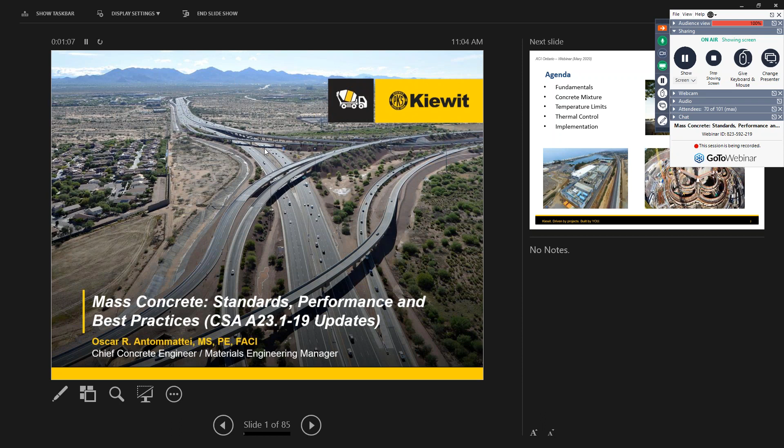So the way that I selected to split this presentation is talking about a few fundamentals, so we kind of start setting our mindset of these discussions and why it's so important. Talking a little bit about concrete mixtures, and then go directly into the temperature limits, thermal control, and implementation.

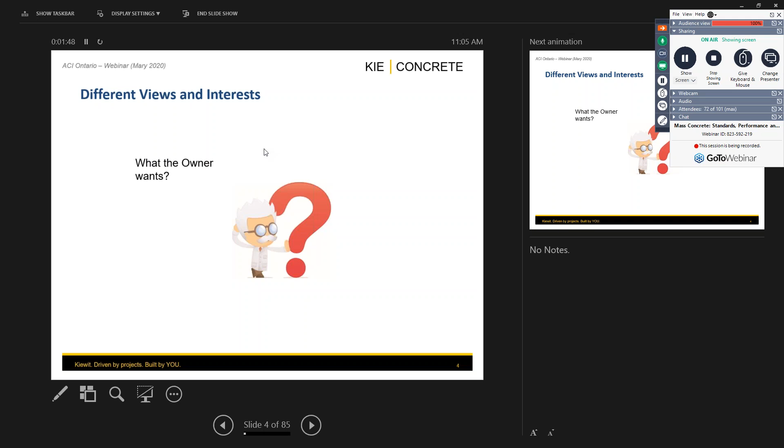So the first thing to understand, and this is really important because there's always going to be different views and interests within our projects: there's always going to be the opinion from the client, from the owner, what the owner wants to build, why they're so concerned about things that we most likely from the engineering side or construction side are not concerned. Why do they want to achieve that? That's extremely important for all the parties to understand.

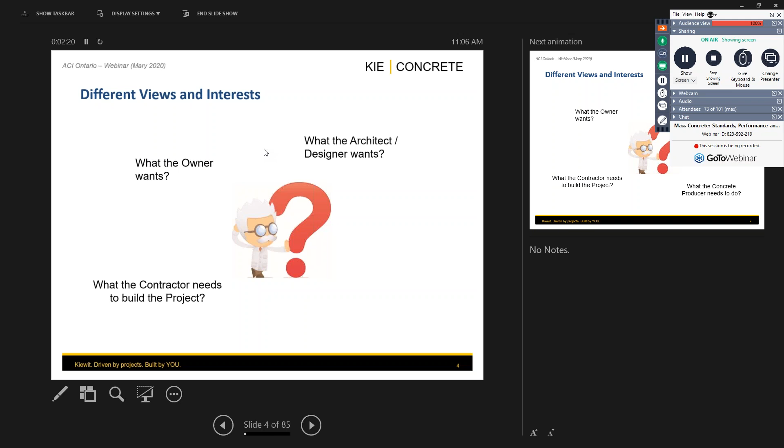Also of importance is to understand what the architect and designer wants to design for and how they're going to meet the design intent for the owner goals, for the owner vision. That's obviously going to be impacting a lot how the contractor then is going to be using information to build the project. Without having the vision of the owner, the requirements from the architect and designer, it's going to be really difficult for the construction team to make a determination what's going to be the final goals of the project to build the project.

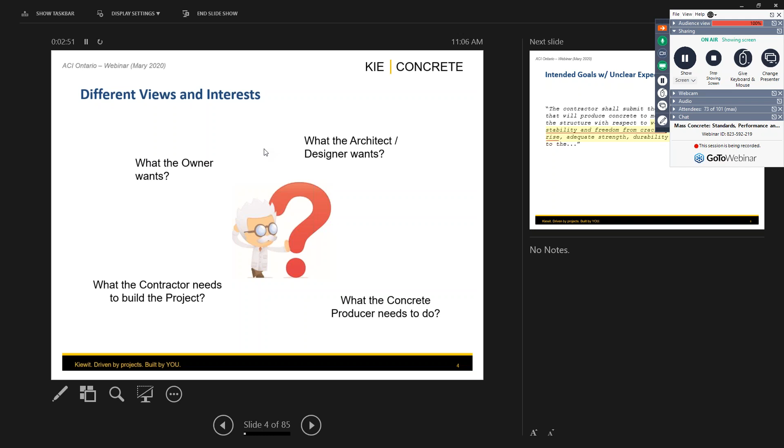And then obviously without forgetting what is important for the concrete materials, how the concrete producer is going to be part of all this effort and what they need to do to ensure that the construction demands are addressed for the construction team to build the project, and how they're going to meet the design criteria to comply with the engineering aspects of the work. Extremely important. Also thinking about,

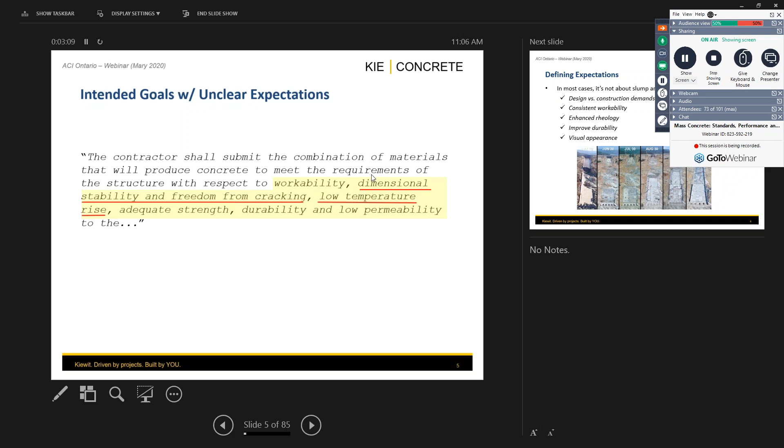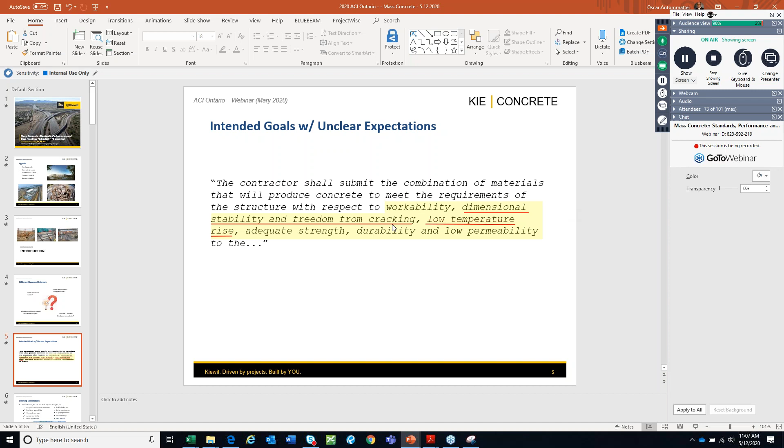Okay, give me a second. I need to make some edits here. Stacia, you tell me that you're seeing my display on the computer? Yeah, I see the next slide. Okay, so thank you. Perfect. So I'm gonna do something here. That's what happened to me too. Okay, no worries. I'm gonna be doing something different here. I apologize. No worries. Let's see if this one works now. That's perfect. Better. Okay, perfect. Thank you very much for letting me know.

So then the other thing that is important to understand as we are working on developing expectations is that there's going to be intended goals from the specifications, but we need to make sure that those intended goals are clearly defined in the specs. And this is an example I like to show because you can see that there's intended goals as part of the specification, but there's no clear expectations on how you're going to meet those goals. And that's extremely important for thermal control and mass concrete too.

In this case, you can see here a very broad sentence from a spec that says the contractor shall submit combination of materials that produce concrete to meet requirements with respect to workability, dimensional stability, freedom from cracking, low temperature rise, adequate strength, durability, and low permeability. But in this spec, and I don't want to get too much into where this project came from, what is the client that shared this spec,

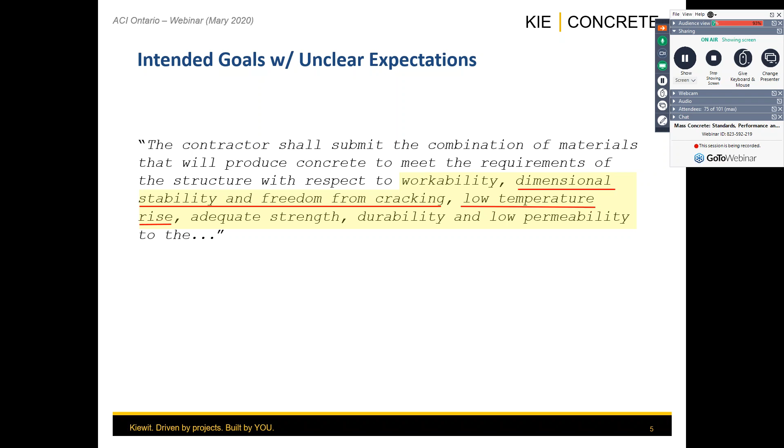in this spec, they didn't have any requirement for shrinkage, any requirement for temperature rise. There was no requirement for permeability, and the only requirements were mainly from a slump perspective and a strength perspective, and some other prescriptive requirements associated to the material requirements. That doesn't help much to define expectations. So it's extremely important that the specs provide clear expectations associated to the goals of the work.

And another thing that we need to be aware of is that in today's market, it's not only about slump, it's not only about strength. Concrete is more than just slump and strength. There's a lot of effort into understanding the performance of the work, the quality of the work, how we can achieve durability. In many cases that we have architectural enhancements, how the visual appearance of the work is going to show up, and also what is going to be the quality efforts and how we're going to meet the design

and construction demands. So when we look at defining expectations, we need to understand that there's more than just a couple things. We need to put in place what is intended to be achieved with the work and how we're going to be able to have a constructible design, a sound design that is going to be able to be built in the field.

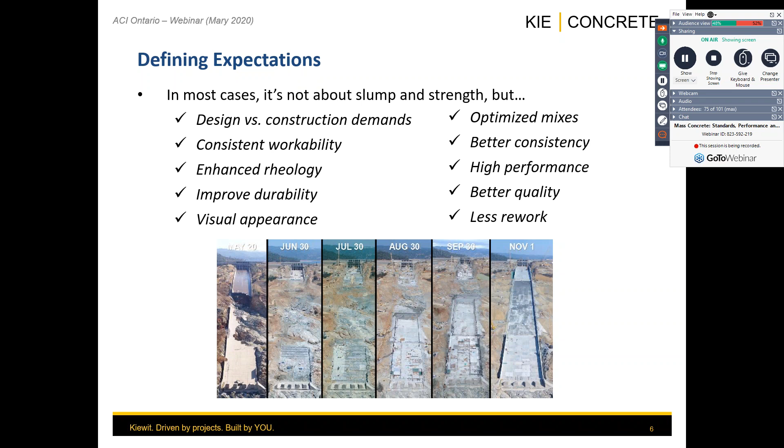So let's talk about fundamentals. And from fundamentals, I'm starting now to show some of the things that we're doing now in CSA. So one of the things that we did in CSA during this past cycle was going over everything associated to mass concrete. I'm going to start talking about the definition. You're going to see in the notes to the definition that there's guidance provided in an annex.

Annex T is an annex that allows you to read through the general considerations for defining mass concrete, for implementing thermal control plans. All of that is going to be included in Annex T. Section 7.6.3 is now the mass concrete section, and you're going to be able to see through this presentation that it is very comprehensive. It's going to talk about definition, concrete mixes, temperature limits, thermal control planning, temperature monitoring.

So let's start with the definition. I'm showing here on the screen the definition that we provided now in the 2019 version. What is important about this definition? Well, what is important is that it's broader into what can be mass concrete and what is not mass concrete. There's not one single dimension that is going to control what is mass concrete. In general terms, there's typically a minimum dimension somewhere around 1 meter where you start seeing the concrete behave as mass concrete.

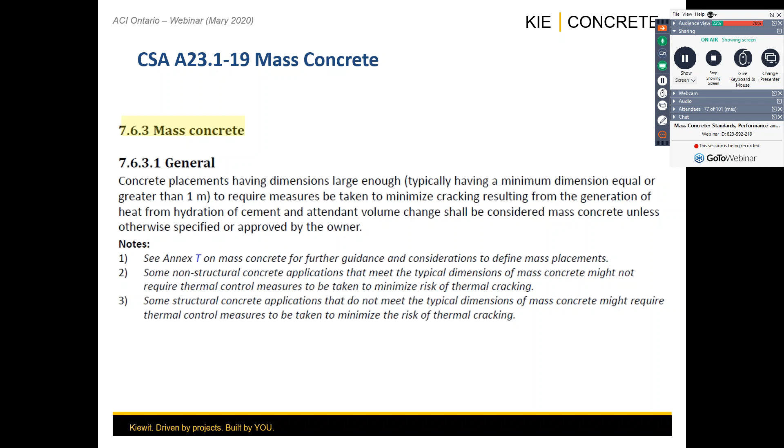So there's a lot of different things that the engineers and the construction team need to consider to determine what is going to be mass concrete and what is not. It would be preferred that the drawings and the specifications give a clear understanding for the project of what's going to be mass concrete. But from a standards perspective, we cannot establish one thing or the other. We can at least provide the definition and then provide guidance within the document to make a determination.

Why is that important? As I mentioned, there's different types of mass concrete. In Canada, you can see a lot of the traditional mass concrete in projects like hydro projects, where you have spillways, big dams, large generation of power with water in the hydro agencies. A lot of those become more of the traditional mass concrete. You implement traditional concepts of mass concrete.

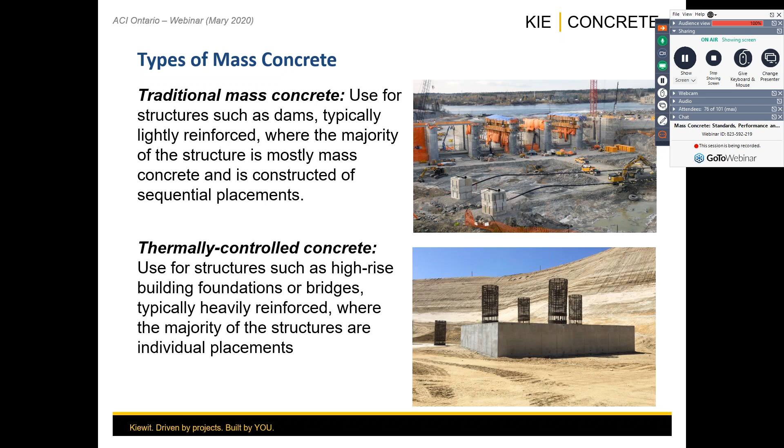But also a large part of the industry in North America is thermally controlled concrete, where you get more into high-rise buildings, into bridges, where you have heavily reinforced concrete, higher strength requirements, higher early strength requirements, and those are also different from traditional mass concrete. So when you're looking at thermal control planning and how you're going to implement best practices, you need to understand the goals of the project, the sequences of construction operations, the design criteria concerns, and then identify what thermal control practices are appropriate for the different applications.

In simple terms, when we talk in ACI and CSA, this is very common. You're mainly looking at: is the concrete hot enough? Do you have enough cementitious material that is going to generate a lot of heat? Or is the dimension of the placement large enough? So what happens there? Thermal risk is going to increase as your mix has higher cementitious materials, because it's going to generate what?

Higher temperature. Then also larger structures are going to have higher thermal control requirements, because they're going to trap the heat. They're typically going to show a higher temperature rise too. And then you're going to have to make sure that you protect the concrete from the thermal conditions. So in general terms, when you look at CSA and ACI, the main focus is going to be on the mixes and the placements.

That's the way that we're going to try to make a determination here of how to define mass concrete. Every project is going to be different. Every project is going to have a different way of looking at it. But from a standards perspective, those are the main things that you're going to be thinking about when defining mass concrete.

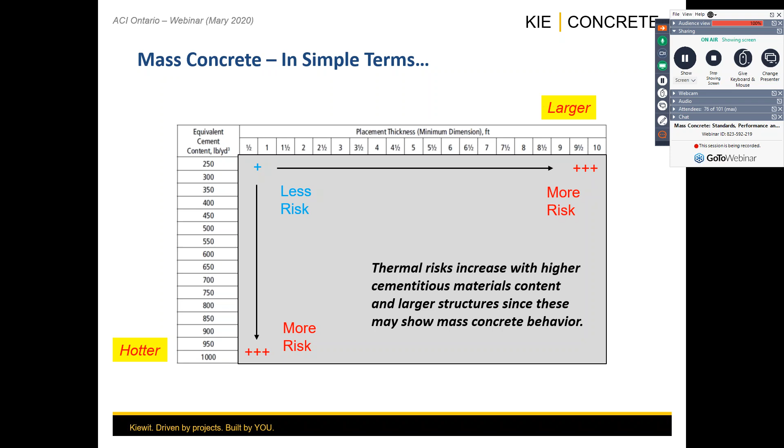So from a concrete mixture perspective, we also need to understand the basics of concrete mixture proportioning and what the standards typically require. There's going to be strength requirements, durability requirements, workability requirements. There's going to be aspects of economics associated to how we determine the mix proportion. But in our case for mass concrete, we're going to have also a thermal aspect associated to developing the mixes.

Meaning that when you have a 35 MPa concrete mix that you're going to be using for a non-mass concrete, most likely you're going to have considerations to achieve strength, durability, workability, and economics in a different way than when you're going to do a 35 MPa mass concrete. And it's going to have to be considered. You cannot say that a 35 MPa non-mass concrete is going to be the same mix that you're going to use for a 35 MPa mass concrete. You can use them if you have them optimized correctly, but you need to understand that they're likely not going to be the same mix.

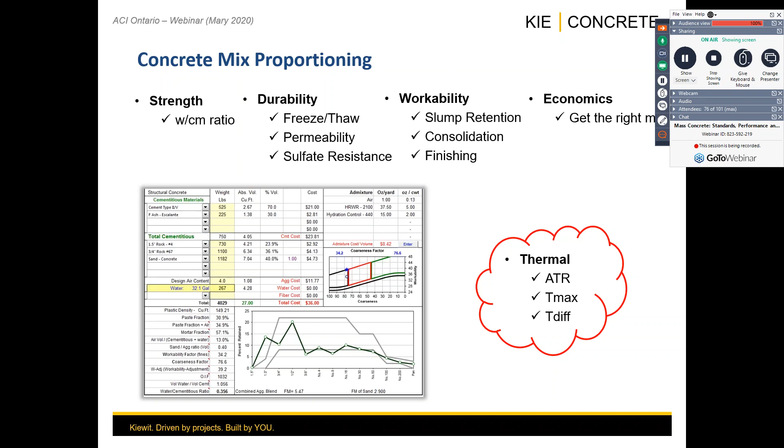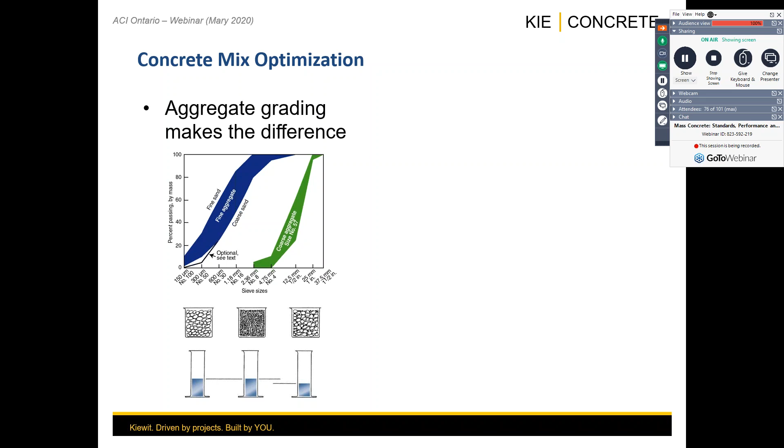And how we achieve mix optimization. And I know in Canada, there's different markets, there's different requirements of how this information is documented for different concrete mix proportions. But in general, there's going to be an impact into how you optimize the grading, how you come up with the mix proportions and ensure that there's a low water demand in your mix by improving the way you select the materials and you select the proportions. But also there's going to be an admixture enhancement for the performance of the product.

So you're likely going to have to then consider, how can I reduce the total cementitious of this mix by improving the way that I come up with the aggregate combinations, with the aggregate selection, with the quality of the materials that I'm going to be using. But also then, after you do that and you have a good mix, how are you going to be improving the performance of the mix to allow for admixtures to be used in the right way. You don't want to be using admixtures as a way to solve a problem that you should have resolved with the materials from a selection and proportion perspective. You want to first have a good mix and obviously then enhance the performance with admixtures.

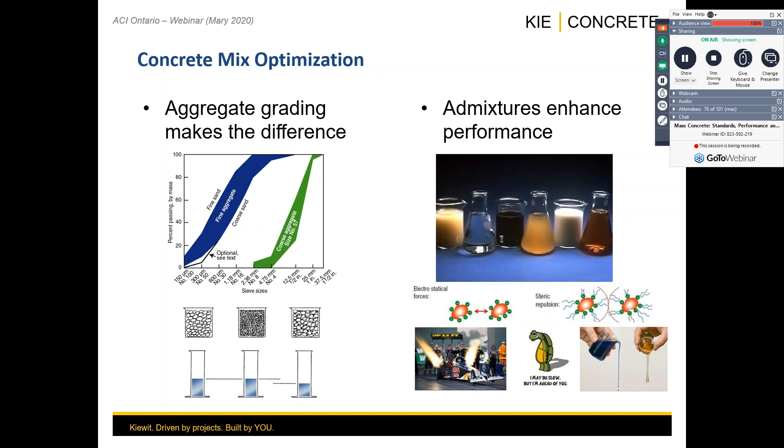So let's talk about temperature limits. I believe this is going to be the bulk of our conversation here. One of the biggest changes you're going to see in CSA, where we expanded how we specify temperature limits for mass concrete. The temperature requirements for mass concrete are going to be under section 7.6.3.2, and this is a very important clause here. And I want to make sure that we just don't jump into the sections below this. We want to understand what this means to the projects.

The temperature requirements for mass concrete placement shall comply with clauses 7.6.3.2.2 to 7.6.3.2.5, unless otherwise specified or approved by the owner. And this is what we're doing here. We're providing all these requirements, but also allowing at the end the engineering team, the owner team, the project to make a determination what is going to be applicable and what is not going to be applicable. And that is an extremely important aspect of specifying. Why? Because there's no one size fits all. And if you try to establish only one size fits all for all mass concrete, you're likely going to have 50% of the times good, and 50% of the times it's not going to be very good.

So with this, we have a standard that has the provisions to meet the objectives and the intent of the standard and be compliant. But we also have allowance for the projects to determine what is appropriate and what is not for different applications, okay? That allows for better flexibility and improves the performance of projects.

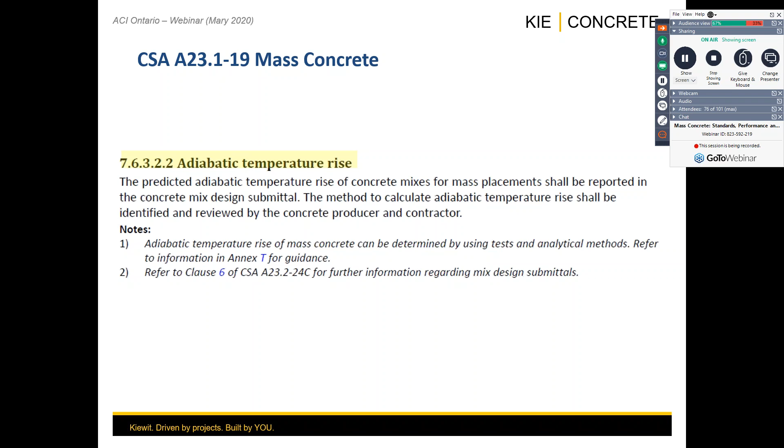It is a very, I would say, interesting requirement that is going to have a lot of questions, I believe, and it's going to have to go through a good level of trial and error and practicing and verification for each of the concrete producers to get familiar. No, it's not a simple thing to just go and say, I know what it is. You're going to have to go through the annex, and the annex is going to go from the simple approach to a more complex approach. So there's a way of doing it for all the different ways that you want to implement here.

So like I mentioned, adiabatic temperature rise is going to be mainly affected by the cementitious materials, the composition, the amount. More cement, obviously, is going to cause the material to generate higher heat. Use of Class F fly ash, in the case of Ontario, is not available, but slag is available. So you can use slag, and you can use low heat cementitious materials to compensate for the heat that you need to meet in thermal control plans for mass concrete. So make sure that you understand temperature rise.

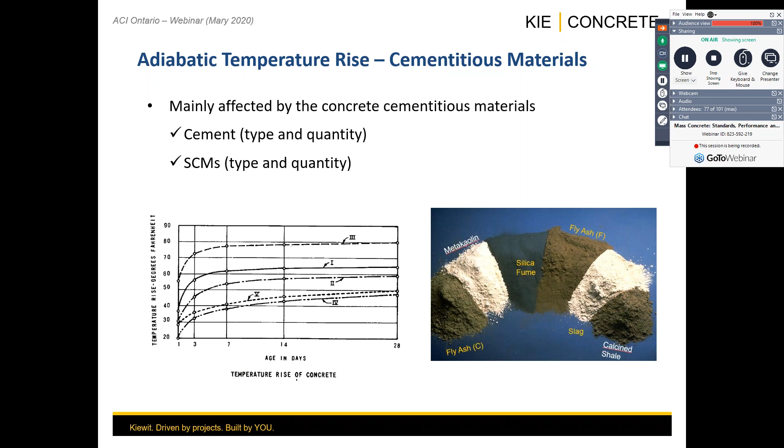In the case of adiabatic temperature rise, I want to share with you some general considerations. In traditional mass concrete, you typically see mixes that have less than 45 degrees Celsius temperature rise. In thermally controlled concrete, more structural, heavily reinforced applications, you typically see hotter mixes. That's expected. Thermally controlled concrete typically has higher strength than traditional mass concrete. Elements tend to be smaller in most cases, and you have more access to different thermal control measures compared to traditional mass concrete in dams. So that's more for guidance, and I'm sharing it in my presentation.

So as you're evaluating the mixes, if you see a mix that you're going to use in traditional mass concrete that has too much heat, most likely you want to start looking at what to do, because it's not necessarily the best thing for a traditional mass concrete placement. You want to optimize that mix. Reducing temperature rise means reducing total cementitious, using less Portland cement and using more fly ash and slags or low heat cementitious materials.

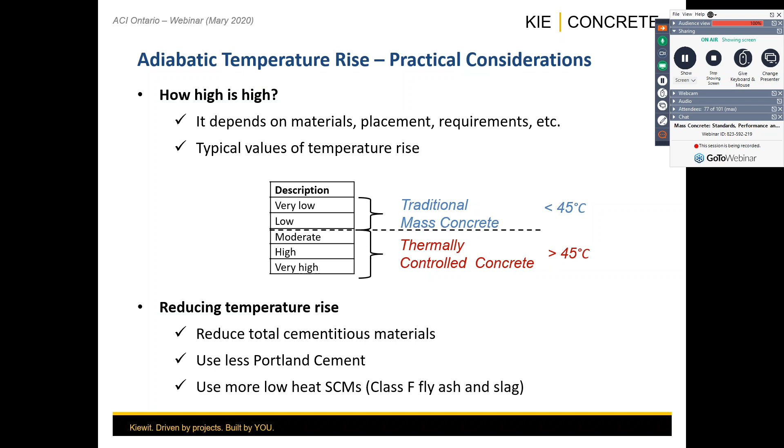This is one example here of concepts that are shared in the annex. You can implement computer modeling, a simplified approach with the calculation that I'm going to show in the next slide, semi-adiabatic testing, a full adiabatic testing method, use field placements and monitor those field placements with sensors and insulation, and even use other methods approved by ACI, such as the Schmidt method, or other methods approved by the owner. So in general terms, there's a lot of ways you can determine adiabatic temperature rise.

It's not going to be a slam dunk. It's not going to be a single value that you're going to determine and never go and revise and verify. I always say develop adiabatic temperature rise, and then go and verify what the temperature rise in the field is compared to what you estimated in your thermal control plan, and then start working on your revisions and updates. So you better go and qualify and refine those temperature conditions in the field more appropriately with the performance of the concrete in service. So those are things that you need to understand as you implement that.

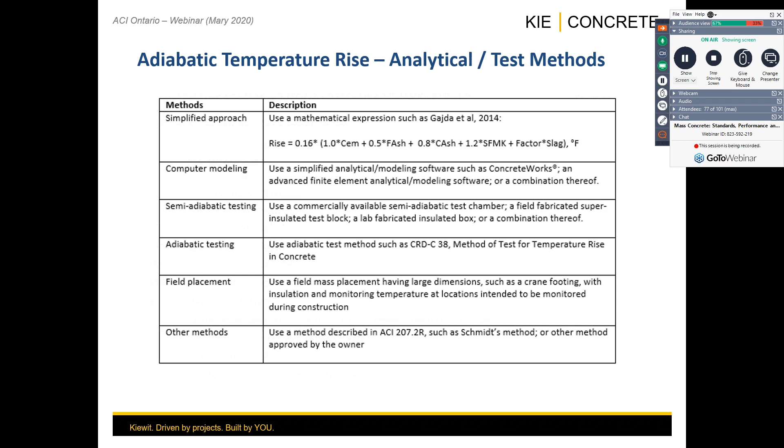The simplified approach is obviously the simplest method in the whole process of determining adiabatic temperature rise. It's intended to be a ballpark rough measurement of adiabatic temperature. It's not intended to be equivalent to saying we're going to determine this and it's going to be a perfect method that we're going to use through the project. It's typically intended to be

when you don't have any other way of doing it and you need to develop a thermal control plan, this is better than nothing. It's going to give you a pretty good estimate of the potential temperature rise of the mix. You're going to be able to determine measures to control temperature rise in concrete, to control maximum temperatures, to monitor and control temperature differentials. And as you get data from the field, you're going to be able to revise your thermal control plan with those revisions. This is provided in Annex T within CSA A23.1-19.

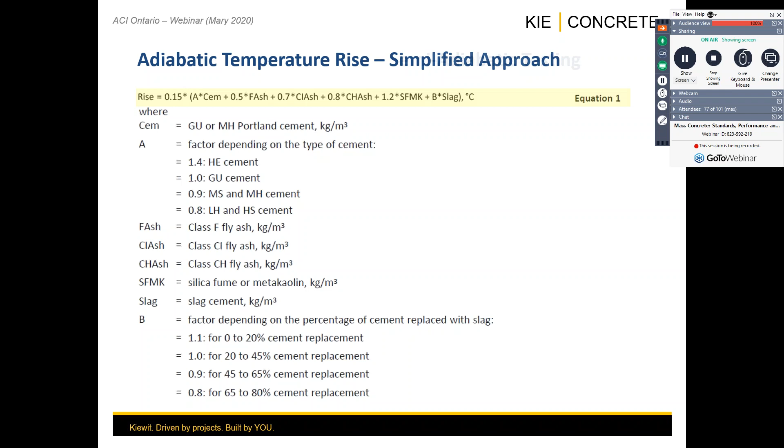And all the generation of heat that occurs in that block is going to be able to then be used in your thermal model to then qualify what is the potential full adiabatic temperature rise. So it's a pretty good and accurate way of assessing adiabatic temperature rise, but this is semi-adiabatic, and you need to obviously take that information from semi-adiabatic to full adiabatic in computer models.

Here is an example of using that information for a computer model where you have the semi-adiabatic test data on the left, and then you take computer modeling, and then you're able to determine the blue full adiabatic calculated curve, which is intended to show the maximum potential of the mix to generate heat. That's the intent of all this, and that's the information you're going to use in your thermal control plan, and then you're going to associate that as your input to determining the thermal properties of the mix and how that mix behaves in different placements.

So if you have an understanding of the semi-adiabatic, and then you analyze the placement with the computer model, then you're able to determine a full adiabatic temperature rise, and that is going to get you a more accurate representation of the temperature rise.

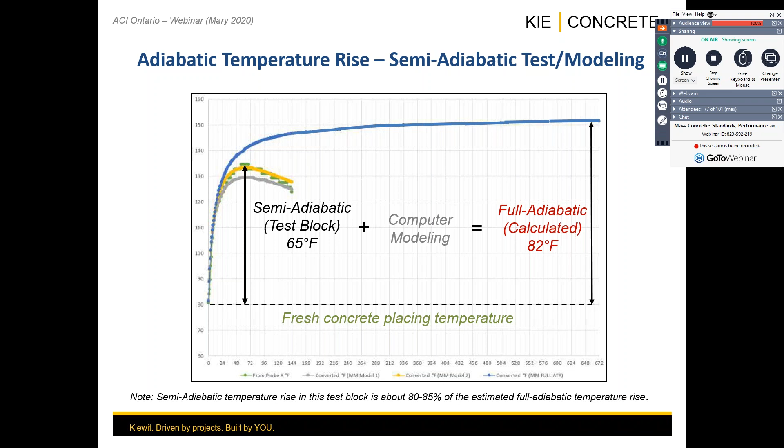Then we go to temperature requirements, in this case for maximum placing concrete temperatures. So what we did in the CSA 2019 version, we looked at the maximum placing concrete temperature and how that relates to mass concrete and thermal control planning. If we have a thermal control plan, the thermal control plan is going to be able to assess the temperature rise, to assess the risk of exceeding temperature limits and temperature differentials, and then it's going to be able to determine the most appropriate placing temperature that you should have for your mass concrete.

In many places, most likely in the summer, sometimes the default limits provided by CSA are not necessarily practical. So in this case, if you have a thermal control plan, you're going to be able to justify the reasonable placing temperatures that you should have for mass concrete. So what we decided to do is put in the standard: in the absence of a thermal control plan, the maximum placing concrete temperature for mass concrete shall comply with Table 14.

But if you do have a thermal control plan, then you can make a determination that instead of a 20 degrees Celsius maximum placing temperature, you can have 23 degrees because you have a thermal control plan that addresses the temperature limits provided by the specs. To allow for compliance, but also allow for a thermal control plan, and based on your analysis, your verification and ensuring you're not exceeding limits, you can manage that placing temperature so you have more flexibility.

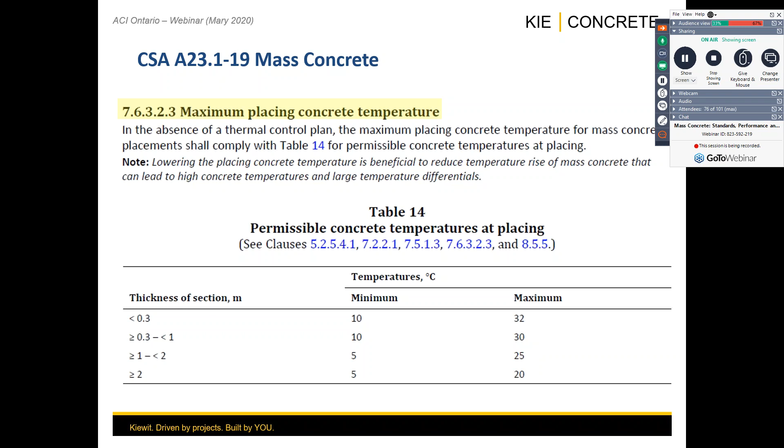The main concerns for placing temperature typically come from the potential detrimental effects to fresh properties. Let's say that you have air-entrained mixes, and you're going to have to pump the mix, and you're going to create friction, and you're likely going to have slump losses and air losses. That's a point of discussion when you're talking about maximum placing temperatures. Thermal and shrinkage are likely going to be affected depending on the placing temperature.

In the actual placement, what are going to be the limits from a shrinkage perspective, the risk from a cracking perspective? All of those things are going to be impacted by the placing temperatures, and also the ultimate strength and long-term durability. In the case of ultimate strength, you know that if you have a very hot mix and you allow that to happen at early age, you're likely not going to achieve the maximum ultimate strength that you want at later age. So there could be some impacts into that.

And from a long-term durability perspective, there's impacts if you have a mass placement that gets extremely hot. You'll likely want to go and manage the placing temperatures because otherwise you're going to affect the long-term durability of that placement. So there's different considerations there, but the goal of the standard is to provide the way of how you should consider thermal control for you to determine the placing temperatures.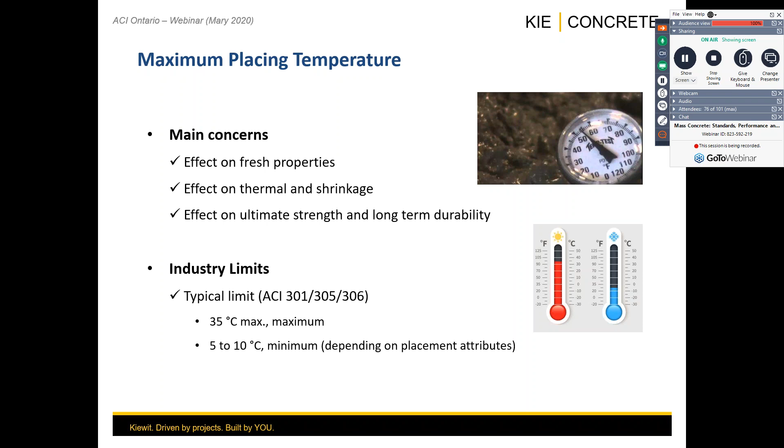Industry limits: when you look at ACI, we have up to 35 degrees Celsius maximum, and the minimum temperatures typically are in the range of 5 to 10, depending on the placement attributes. So there's room there for improvement, but do not go beyond Table 14 unless you have a thermal control plan. That's the main intent. Follow a thermal control plan before you determine what adjustments you want to do.

The next one is going to be maximum concrete temperature. On the maximum concrete temperatures, we had a lot of good discussions, I believe, during the past few years on what was going to be the most reasonable way of addressing this. Actually, there was no maximum concrete temperature limit in the CSA document. There was only a limit for high strength, where you would limit to 70 degrees Celsius, but there were no limits for mass concrete maximum temperatures.

What we did in this case is, in consideration that we're not going to be able to have all the specifics of the concrete mix proportions, but we know that the mix design submittals are going to identify their HVSCM1s, HVSCM2s. That's information that is known. There's no intent here to provide to the user any of the proprietary information from the mix proportions by the concrete producer. So, in consideration of the benefits of high volume SCMs, we allow increasing the maximum temperature for mass concrete if you go to HVSCM2 or HVSCM1.

HVSCM2 is going to allow you to go up to 75 degrees Celsius. HVSCM1 is going to allow you to go to 85 degrees Celsius, meaning that at that point, in many cases, 50% of your cementitious materials are already accounted for by SCMs, right? So in that case, you have an improvement in the chemistry of hydration. You obviously are already taking care of the chemistry of the cementitious materials, and given the research and the feedback from the academics within the committee, with all the research being done to date, including ACI considerations, it was found that these numbers were going to be reasonable for the standard.

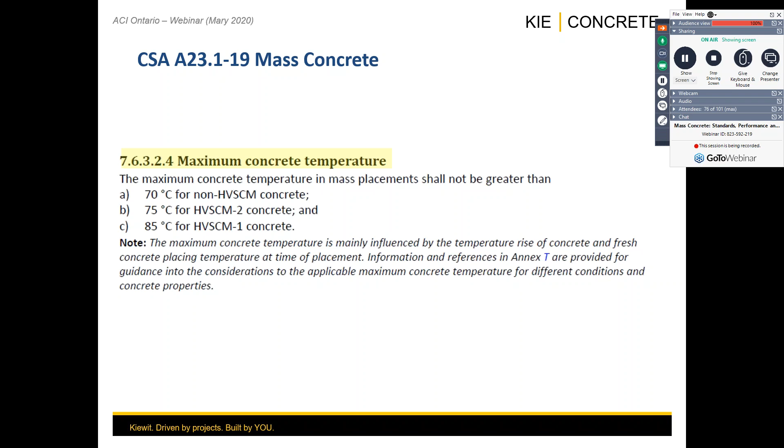The main concern for peak temperatures, maximum temperatures, as many people would know, is mainly the long-term effect on strength and durability. On the strength, it's pretty simple. If you go to higher temperatures, you're likely going to start affecting the quality of that hydration. You're going to start affecting the chemistry within the hydration products, and not necessarily getting the best out of your concrete mix.

That has been found to be above 85 degrees Celsius. The same with durability, but in durability, you have different limits. Above 70 degrees Celsius, without any mitigation, without any improvements in the chemistry, without any SCMs, for lack of a better term, you are likely going to see risk on impacting the durability of the concrete.

However, as shown in the ACI documents 308 and 201, and lots of research already completed to date, as you start providing mitigation into the chemistry, into the cementitious materials, bringing all those SCMs into the mix, then the improvement in durability starts to occur, and then you can go up to 85 degrees Celsius. There's no recommendation provided right now by the industry or consensus to allow higher than 85 degrees Celsius, regardless of the mix that you have.

So the gray zone is pretty much between 70 and 85, and the effects of SCMs are well known, and that's why the efforts that CSA have done are to concentrate on the improvement at higher temperatures with SCMs. That's it, keeping it simple.

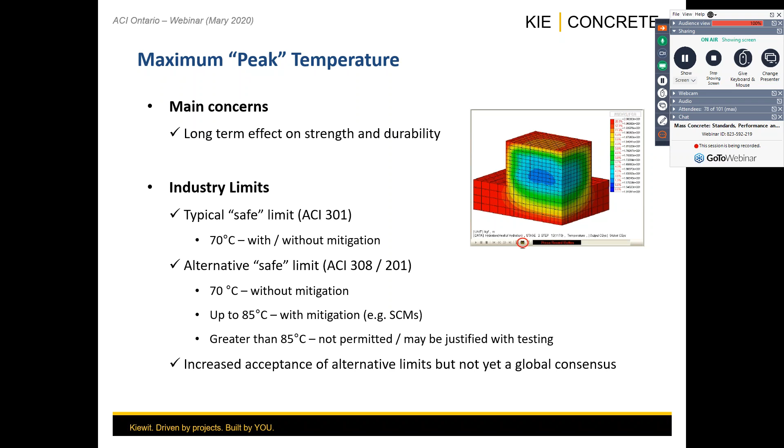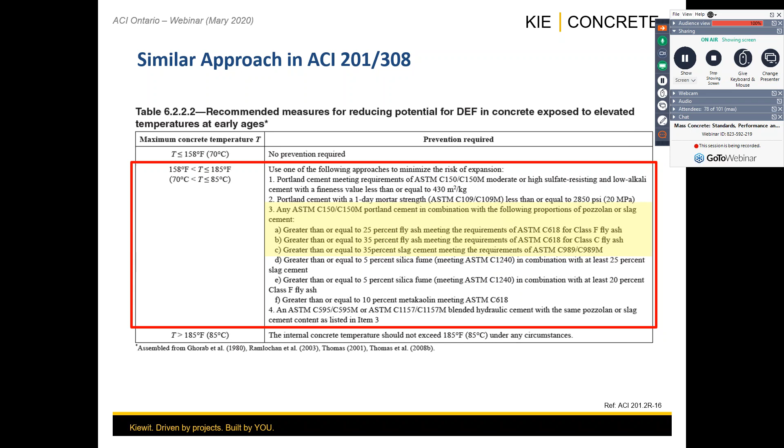The next one is also interesting. We have had numerous conversations on this one, and this is the maximum temperature differential. Many standards, including the CSA standard, had concentrated their efforts on establishing a one-size-fits-all 20 degrees Celsius. That comes from an empirical assessment over 100 years ago in Europe, where they were trying to figure out how can I control the concrete from having thermal cracks if I don't know what else I can do for this material, right? Without getting too complicated. What can I do?

And they found with those tests with their materials in Europe that for that application they needed to maintain the temperature differential less than 20 degrees Celsius. Now that continued to disseminate across the industry, and everybody assumed that as long as you don't exceed 20 degrees Celsius, then you don't have a problem with thermal cracking, right? Regardless of the mix, regardless of the properties of the materials, regardless of the restraints, they use that number as a one-size-fits-all. Well, that's not necessarily accurate, not necessarily representative, and not necessarily allowing the industry to improve on their performance approach.

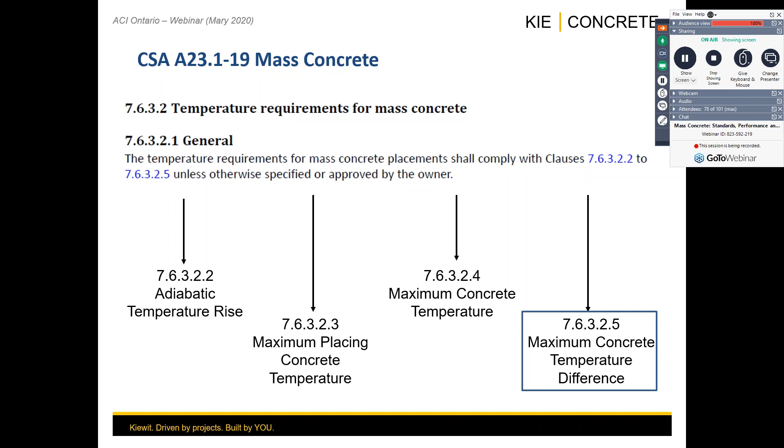So we have now different considerations that I'm going to be explaining here, and you're going to be seeing that in the CSA standard. So the first one is 7.6.3.2.5.1. That one uses the 20 degrees Celsius fixed limit as the temperature differential, okay? So it establishes the same that we have been using to date. So you say that you're going to have 20 degree maximum differentials, and that's your specification. That's all you want to do. However, the standard allows you to go into other ways of specifying temperature differential.

7.6.3.2.5.2 allows a 25 degree Celsius temperature differential if you can verify that the concrete coefficient of thermal expansion is less than 10 millionths per degree Celsius. Why? That's well recognized. The lower the coefficient of thermal expansion of your concrete, the more resistant to temperature differentials you're going to be. And it's well reported that as you get below 10, you can tolerate 25 degrees Celsius as a reasonable temperature differential within your concrete.

The other one, under 7.6.3.2.5.3, takes a concept of how concrete behaves, right? Concrete does not start from the first day already ready to tolerate the same thing as it can tolerate at 7 days. So how does concrete behave? Concrete develops properties, and the resistance to thermal cracking increases as the properties develop. So the same approach in this case, and there are some agencies using it in North America, US and Canada, where they have an incremental approach.

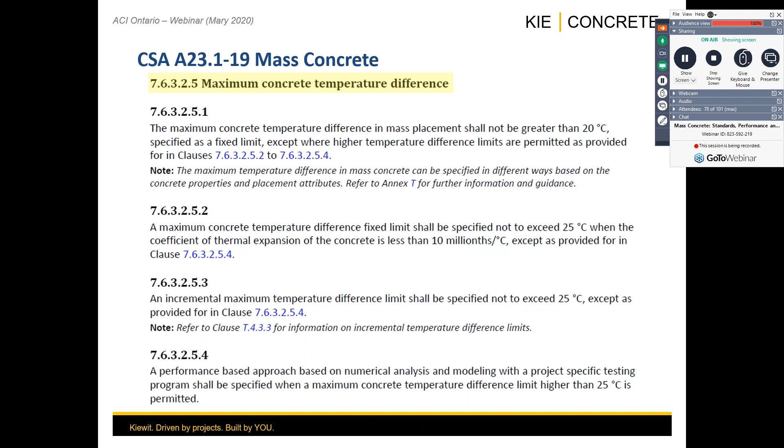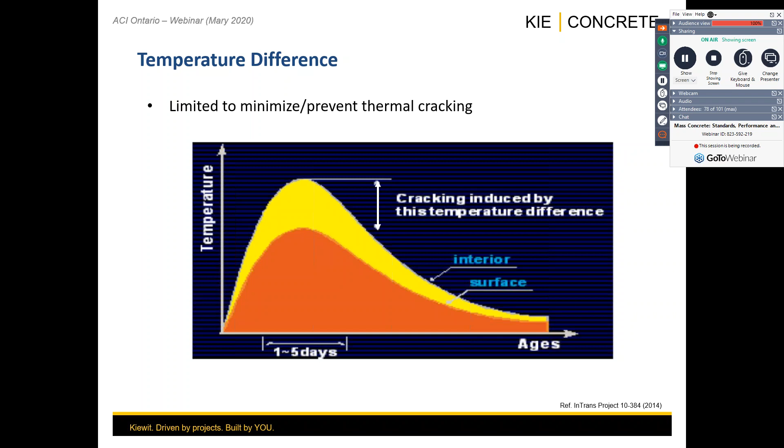So you need to make sure that you establish a gradual heat loss from the surfaces. That's a key element. You want to allow temperature difference to occur, but you need to create a gradual heat loss, and that gradual heat loss obviously needs to be taken into consideration. So that's important to understand. Now, if we create a large temperature difference at the surface, the tension on the surface is going to lead to cracking.

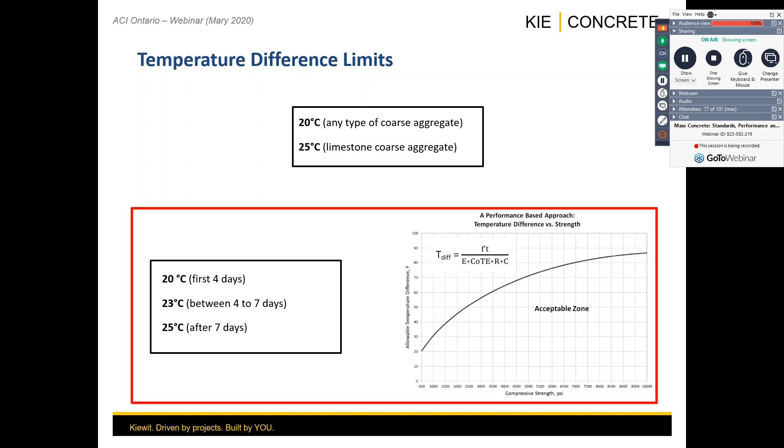And on the right side, we have the conceptual graph for a performance-based approach, the curve with compressive strength in the x-axis and the differential in the y-axis. By doing that, you can monitor the development of strength in the field and then assess what is the appropriate temperature differential for your concrete placement and determine the thermal control measures to control those temperature differentials. You have a live-basis approach to controlling the temperature differentials in the field.

So thermal control plan, we go down to what is important here. We have a couple of things in a thermal control plan. We have temperature monitoring, a very important aspect of thermal control plans. We obviously need to be measuring temperatures of our concrete at the locations that are thermally controlled, and those are going to vary on the projects, on the placements, on the work.

But typically, you're going to have one at the maximum core, where the maximum temperature is going to occur, and you're also going to have sensors on the outside, meaning on the rebar that is closer to the surface. Those sensors are going to have to be secured at a point that the standard allows to be between 25 and 75 millimeters.

Because at that location, your rebar at that location is where you're going to install the sensors. If you have a point of installing the sensors that is not a place that you can secure the sensors, there's not a true way to qualify what is the measurement that you're taking and what it means to the placement. That's a very important aspect for establishing surface.

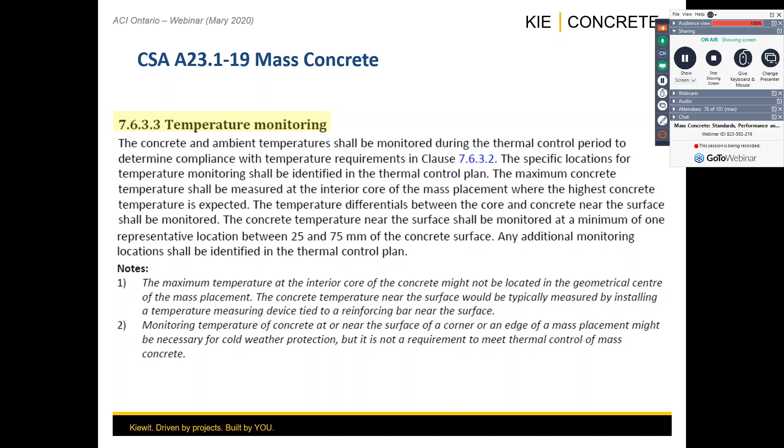Contractors shall submit the thermal control plan to demonstrate the requirements. Monitoring temperatures will be achieved during the thermal control, unless otherwise approved or specified by the owner. Meaning that if the owner wants modifications to the thermal control plan, if you don't need to provide a thermal control plan, or wants to make different considerations to a specific element, they're always open to go and adjust those for the project.

But here you can see in the thermal control plan all the things that you want to consider, from the dimensions to the mix design to the analysis that you did, the properties of the concrete, temperature rise of the concrete, the limits that you're going to be abiding by for developing your thermal controls. You can see also here requirements to avoid thermal shock.

In previous versions of CSA, we have used the temperature drop table. That table 20 was developed originally in Canada for cold weather concreting. It's intended mainly for removing insulation in cold weather. We decided in this case to have it just provided as guidance in the notes. It's not a requirement to comply with that, and the requirement is pretty much to have a thermal control plan that is going to specify what is the appropriate temperature drop in 24 hours.

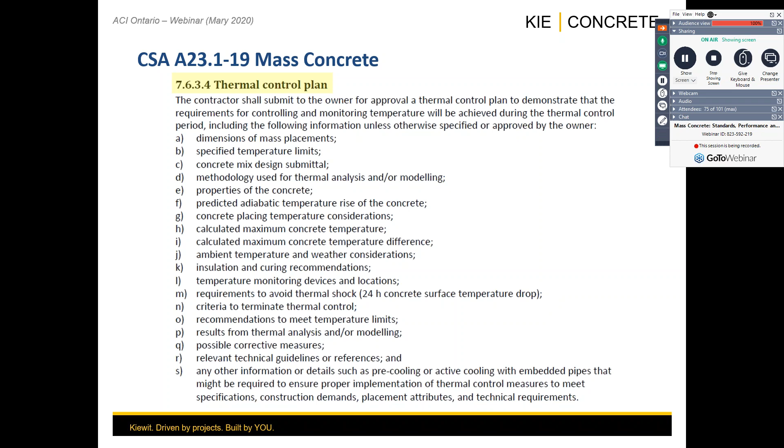And you're going to find different ways that you can require to terminate thermal controls. One of the main considerations is obviously going to be, because thermal controls are likely going to be removed after 7 days, maybe 10 days. Typically that doesn't happen as quick as 3 days, unless you have some type of an active post-cooling system like cooling pipes. But if you get into determining what is the right approach to terminate thermal control measures, then you need to allow the thermal control plan to establish that. So all of that is part of the thermal control plan that you need to include per CSA.

Well, you know what? Cracks are likely going to happen for many other reasons. Just because you get a crack in a mass concrete placement, it doesn't mean that you do not have a good thermal control plan. Most likely that's something that needs to be discussed with the design allowance for cracks. And many of the reinforced concrete elements that we see these days many times have huge amounts of restraint that are not allowing for a no-crack situation.

So that's very important, because many people get excited when they see cracks, but they need to understand where the cracks come from. The structural design most likely already allows for cracks. The thermal control plan did everything they could to manage the cracks. But what is the crack tolerance in the project, and what is reasonable to make sure that you can build a project within the scope?

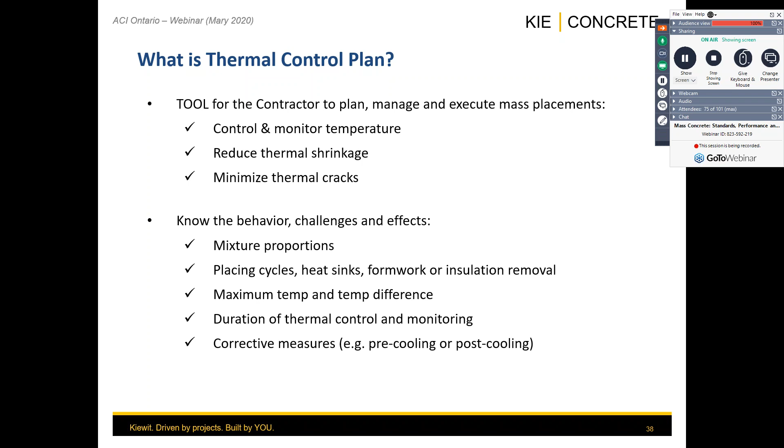Many times you get into situations where you have to put cooling pipes. And that's part of evaluating a thermal control plan. You may have to evaluate putting liquid nitrogen or having to do a major change in the mix. All of that is going to be something you're going to be able to determine by looking at the thermal control plan.

So the last part of my presentation, which is implementation, is going to go over the basic steps. Now that we know the standard, now that we know the requirements that we have in CSA, what are the basis of all this work and how can we achieve it in practice? So the first thing, analytical modeling: we need to do some type of assessment, evaluate it, model the system. Then we develop a thermal control plan with all that information.

Field implementation. After you have a thermal control plan, you need to verify that you have a way to implement it and that the plan is going to be achievable in the field. Once that plan is in place and you execute the work, you need to verify and validate that the plan is working. After you verify and validate, if a revision and update is needed, then you go and do a revision and update.

And why is this important? This concept is extremely important because thermal control plans are to some extent live documents. You keep observing and monitoring the generation of heat in the field, and because the weather conditions and the construction conditions are not perfect, you're going to have to make adjustments. So you need to have a process for generating a thermal control plan and implementing it correctly. It's not going to be one-size-fits-all forever.

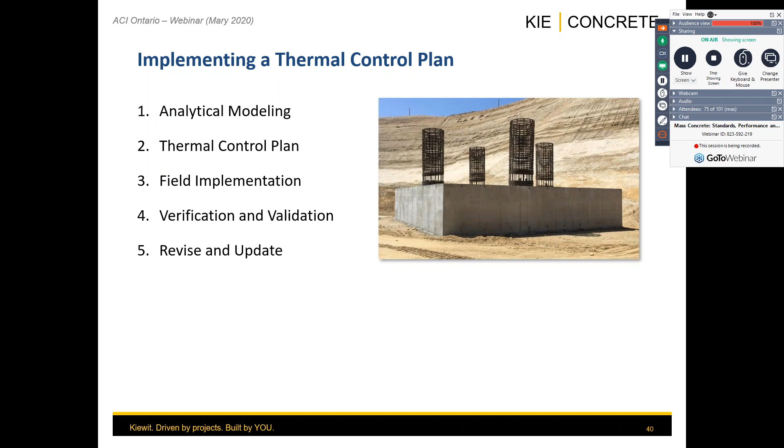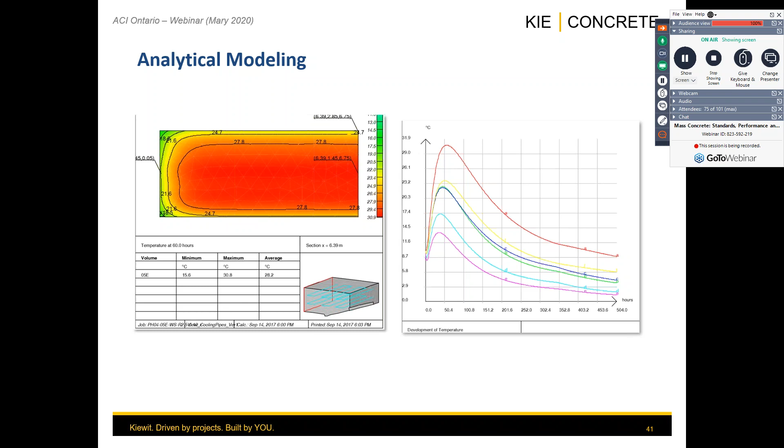So here are some examples. You're going to do analytical modeling. This is an example here. You're going to see the amount of generation of heat, the generation of heat at different points of the curve. You're going to see, if you need cooling pipes, how you can implement them. All of those conditions are going to be part of our analytical model.

What about how you produce a thermal control plan? What are the considerations for the user? What is the construction team going to want to know? Well, here's an example of a more comprehensive table that we have, where we have a full year-long assessment for different weather conditions and different installation conditions. You can identify the ambient temperature conditions and the different placing temperatures that you can consider in your decision-making process.

And then in this case, do you want to have insulation? What type of insulation can you use to comply? I'm just showing here some examples. In this case, if you go with light insulation and your ambient temperature is 50 degrees Fahrenheit and 70 degrees Fahrenheit, and you use R1 insulation, you know that you're not going to be compliant

to the 35-degree limit. However, if you place the concrete at 60 degrees in this case, or if you decide to use thicker insulation, you're likely going to be able to determine that the thermal control plan is compliant for your placement operations. So that's a way to look at a table like this.

In this case, it's of importance, and I'll show you why, that the termination of the thermal control plan is based on a 50-degree Fahrenheit temperature difference between the ambient and the core, and that's equivalent to a 25-degree Celsius temperature difference between the ambient and the core.

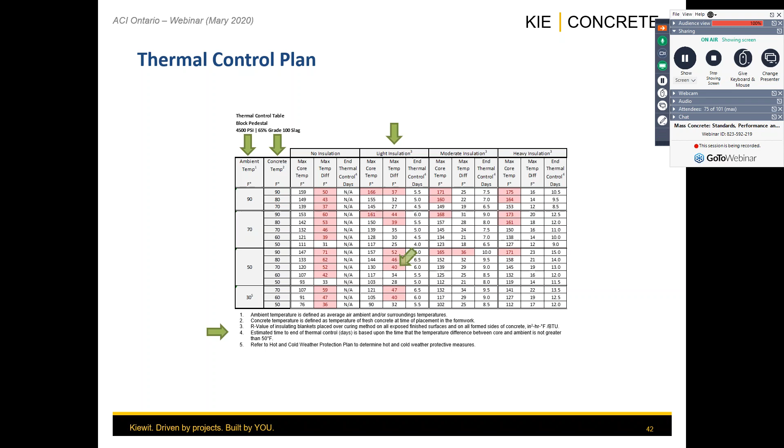Why is that? Because you know that when you're going to remove that, it's already 7 days later, and after 7 days, your concrete is already going to be able to tolerate the 50 degrees Fahrenheit. That's something that the thermal control plan is going to be able to determine as you run analysis and you understand the properties of the mix.

In this case, I wanted to show here an example, and I have it in English units, not metric units, but 25 degrees Celsius is 50 degrees Fahrenheit, and 20 degrees Celsius is 35 degrees Fahrenheit in temperature differentials. So you see the impacts from making a decision to terminate the thermal control plans at 20 degrees Celsius or 35 degrees Fahrenheit versus having the concrete terminated at 50 degrees Fahrenheit or 25 degrees Celsius.

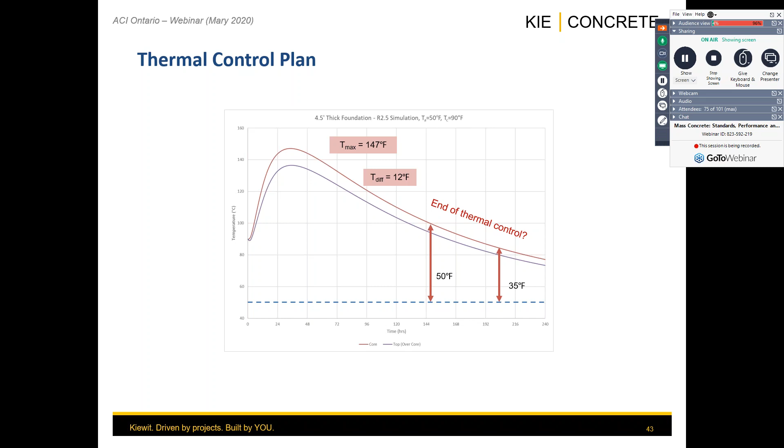You can actually reduce the amount of thermal control, because at that time you're allowing the concrete properties to develop over time, and you can tolerate that temperature differential. That's something the thermal control plan can allow and can evaluate on a case-by-case basis.

Field implementation, as you can imagine, has different ways of implementing under different conditions. Temperature monitoring, as I mentioned, make sure that you secure that to the rebar closest to the surface. Then obviously, if you need to have liquid nitrogen or use ice, you're going to have to make that determination for pre-cooling.

Insulation from a model compared to insulation in the field is going to be different. And that's one of the most important parts of field implementation, that you need to verify that insulation is accurately represented in the model, but it's not going to be perfect. Nobody can represent insulation or weathering conditions perfectly in a model. That's a complete science project, an academic exercise, but in practice, it's going to be impossible to do in that determination.

And then if you need cooling pipes, you need to make that assessment too. It's part of the thermal control measures that you can consider. In many cases, that's the way to go. In many cases, you don't have to go that way.

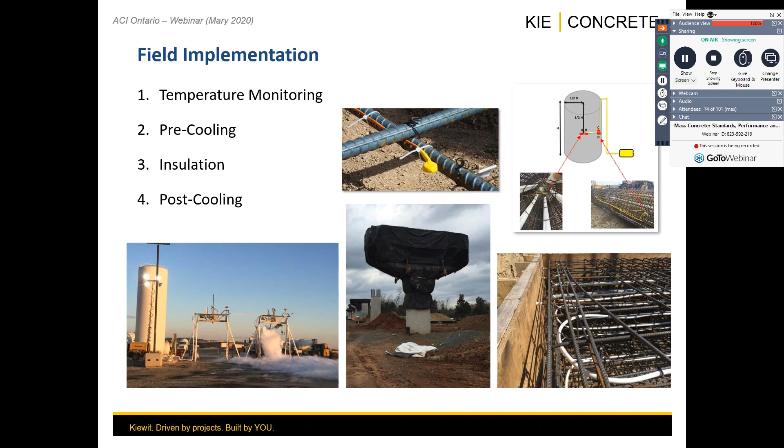And you can then modify the parameters, and you can determine how you can most accurately represent the field with your model. That's all you're trying to do. What is the best way for me to represent the field with the model? So this is a way of doing verification and validation.

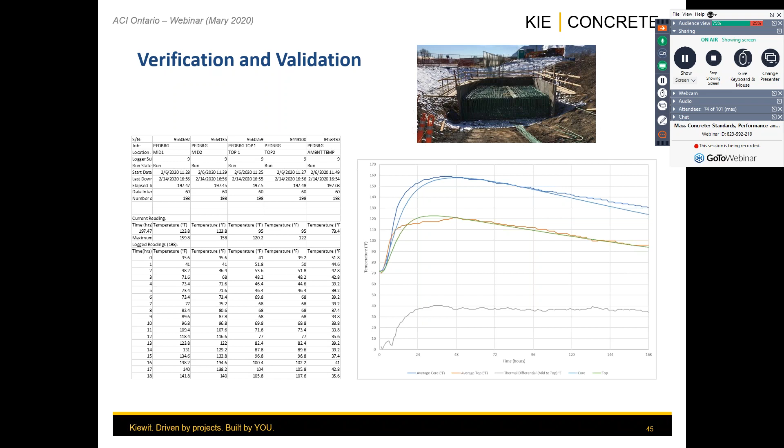And here on revisions and updates, I believe the best way to understand this is, when is a revision necessary? When do we need it? Do we have issues with the model being inaccurate? Do we have issues with a change of construction sequences or materials or means and methods? And then other things we can consider, right? Inadequate field implementation is very common. Many times we see the field implementation is not accurately represented as we recommended in the models.

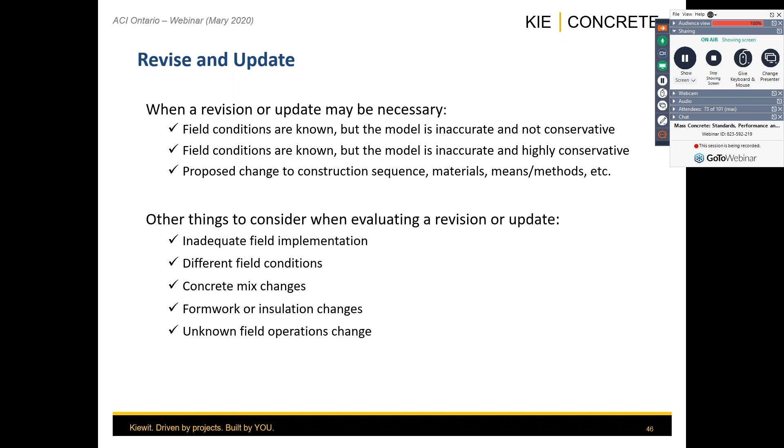The field conditions changed. We have a cold front, and they didn't account for the cold front, or we got rain, and they did not protect the concrete surfaces, or the formwork and insulation had some changes, and we did not account for that in the thermal control plan. Was there any field operation that affected the measurements? Did they install the sensors in the right locations? Did they produce or use the right mix? All of those things are going to be part of your process to determine if you need to do a revision or an update.

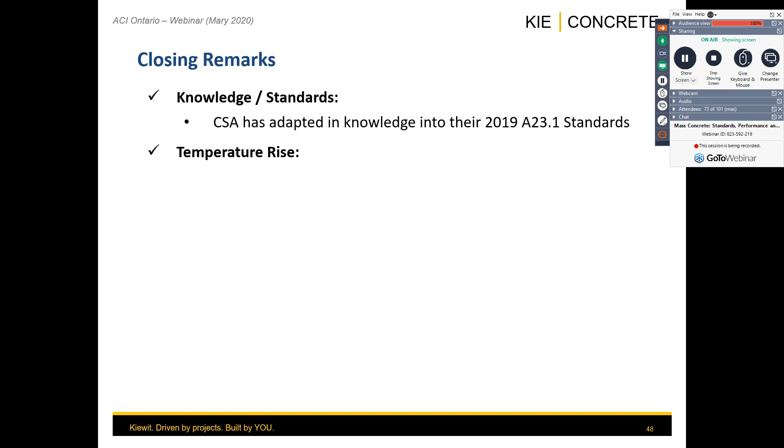So now, to be on time, pretty much the closing remarks, right? From a knowledge and standards perspective, I think that we are at the front of this industry. CSA has adopted knowledge into their standards for 2019. That's a great thing. That's a big win for CSA. Temperature rise, you want to know it. You want to make sure you optimize the mixes to reduce heat.

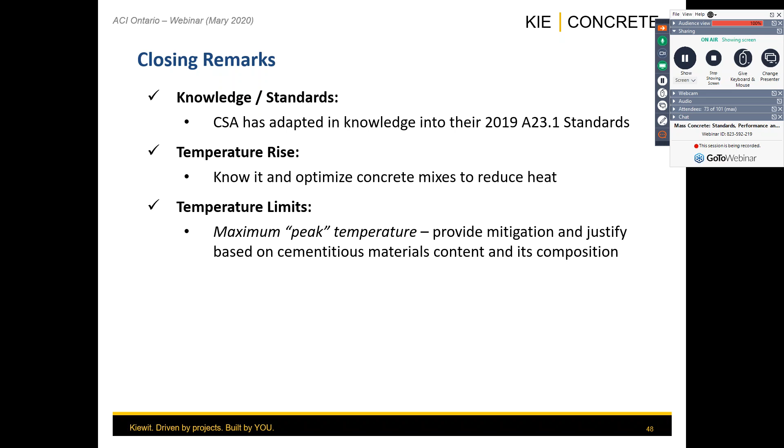You want to make sure you understand how much temperature rise you got in that mix. Temperature limits: we have a maximum peak temperature. That's your Tmax. Make sure you understand mitigation and how you can mitigate the potential issues to exceed the temperature limits, and how you can justify using different cementitious materials to improve the quality of that heat of hydration.

The other part is temperature differentials. How can you develop appropriate temperature differentials for your project? And how can you consider testing and analysis to implement a performance approach in your projects? That's going to allow you to create a more efficient and reasonable thermal control plan for your projects too.

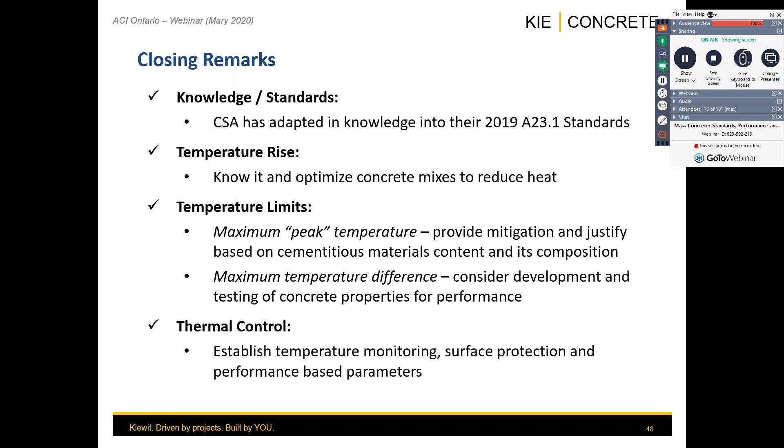And in general, thermal control: establish temperature monitoring, surface protection, and performance-based parameters. Those three things are going to be the key to ensure that we have adequate thermal control plans for construction and are within the reasonable approach provided in the CSA standard.